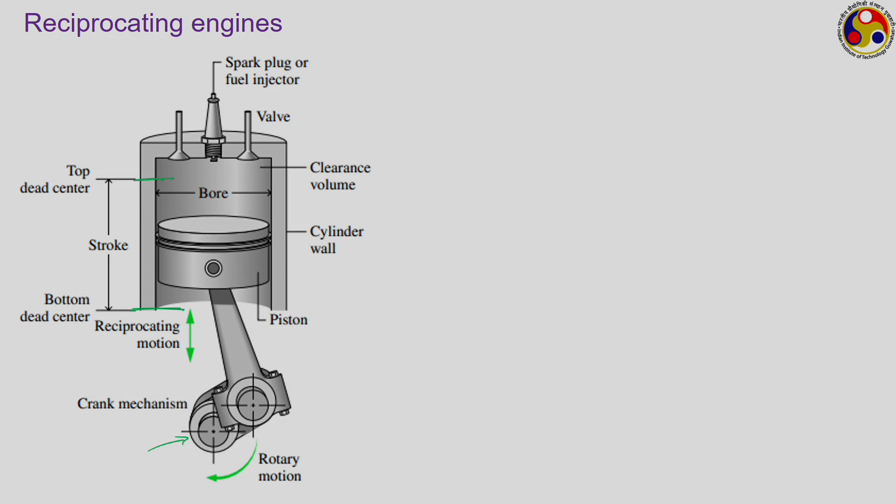We have the crankshaft here and the crank mechanism. The crankshaft rotates, and the corresponding rotary motion is converted to the reciprocating motion of the piston by the crank assembly or crank mechanism. A 180-degree rotation of the crankshaft corresponds to one complete stroke of the piston. And when the piston is operating, this is the situation that we generally get.

This animation I tried to show in the previous week itself, but somehow it malfunctioned. Just look at this point, it starts - this is the suction, now it is compression, this is the power stroke, and now it is the exhaust. During suction, look how the inlet valve is opening. Both valves were closed during compression and expansion, and now it is opening again during the exhaust stroke.

If I run it again - this is compression, this is expansion, and now the exhaust valve is open to have the exhaust stroke. As soon as the exhaust valve closes, the inlet valve opens again to facilitate the inlet or suction process. So this way the cycle keeps on operating.

Generally it operates at a very high speed. It is very common to have cycles operating at something like 3000 rpm. 3000 rpm means we are talking about 3000 full revolutions of the crankshaft in 1 minute.

So, 3000 revolutions per minute is equal to 3000 by 60 revolutions per second, that means we are talking about 50 revolutions per second. That means in 1 second the crankshaft has 50 revolutions, and if we are talking about a 4-stroke engine, we know that 2 revolutions of the crankshaft, or 2 full rotations, correspond to 4 strokes, that is 1 full cycle. So, 50 revolutions per second leads to 50 by 2, that is 25 cycles per second.

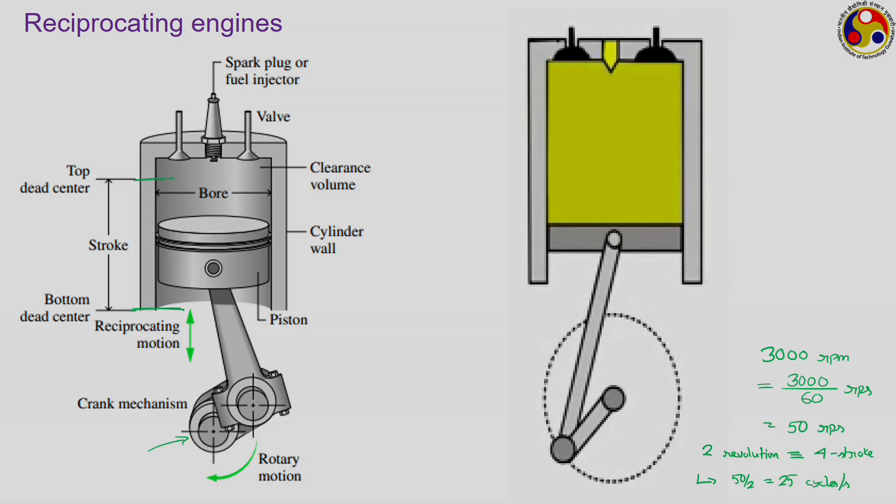So that is a very high speed that we are talking about, and this is generally the way all 4-stroke engines work. This is the ideal cycle, again a slide repeated from the previous week's work.

This is the actual operation where we have the compression stroke to start with, then we have the power stroke during which the piston is moving down from the TDC to BDC following a spark which is produced here. There is a 4-stroke spark ignition engine. Then finally we have the exhaust stroke.

During the exhaust stroke the exhaust valve is open, and at the end of the exhaust stroke, as soon as all the exhaust gases have gone out, we have the suction stroke starting again, during which the piston is moving down, making more space for the new fuel air mixture to come in. And this is the corresponding representation on a PV plane.

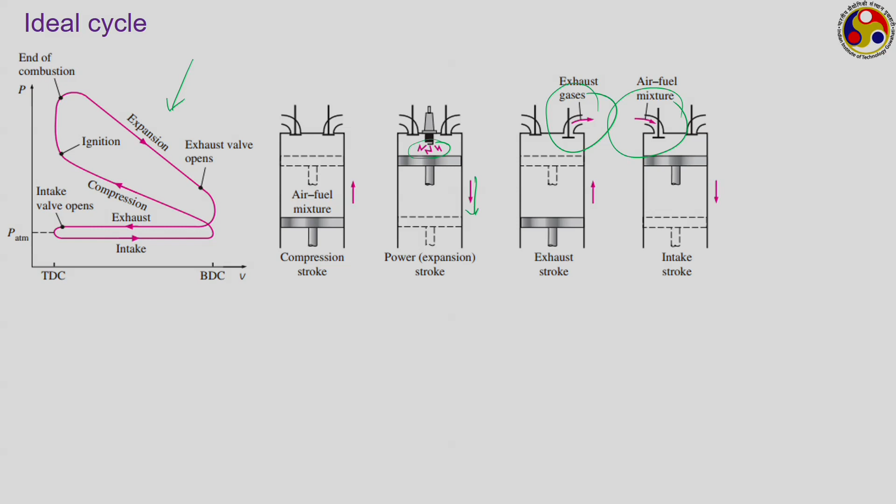However, this is the actual cycle, and this we have conceptualized in the form of an ideal cycle, the Otto cycle, just like this, where we have assumed several air standard assumptions, and following which we get this representation. In the Otto cycle, we have 2 isentropic processes and 2 constant volume processes. The heat addition is at constant volume, and similarly heat rejection is also at constant volume. In between we have an isentropic compression process and an isentropic expansion process.

So this isentropic compression process represents the compression stroke. This isentropic expansion process represents the power or expansion stroke. The spark which is happening here is conceptualized in the form of this constant volume heat addition, and the exhaust and inlet processes together have been coupled into this one constant volume heat rejection process. This is as per the air standard assumption.

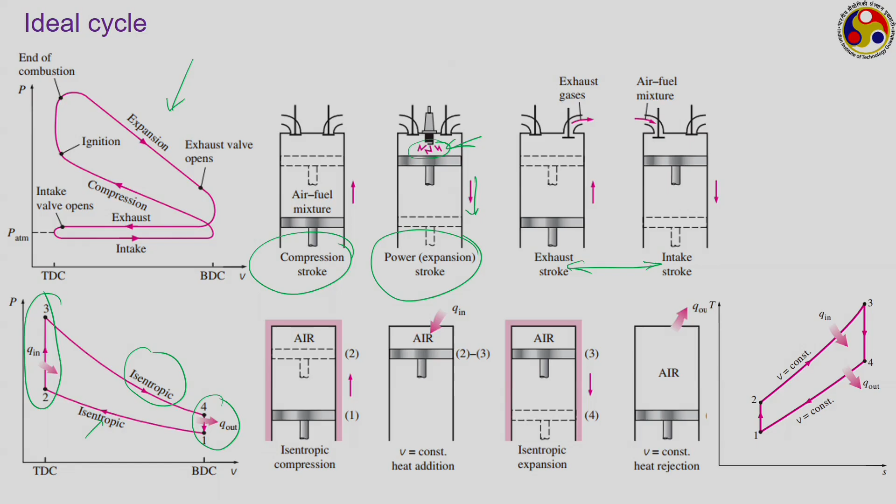This is the corresponding representation on the TS plane. It is generally ideally suited to represent each of such cycles on both PV and TS plane, because the area enclosed by the diagram on the PV plane is a direct representation of the total work done, whereas the area enclosed by the cycle on the TS plane is a direct representation of the total heat interaction or net heat supplied to the system.

As per the first law of thermodynamics, for a closed system undergoing a cycle, we know that the cyclic integral of del Q is equal to the cyclic integral of del W, from where we can easily say that the net heat supplied to the system has to be equal to the net work output that we have obtained from the system.

So, any of the diagrams is theoretically sufficient to provide you the performance parameters in the form of work output or efficiency, but generally it is logical to represent both, so that we also get ideas about the maximum pressure, temperatures, etc., for the cycle. Now, this is an ideal cycle, the Otto cycle. Similarly, we can also draw the diesel cycle, as we have already discussed in the previous week.

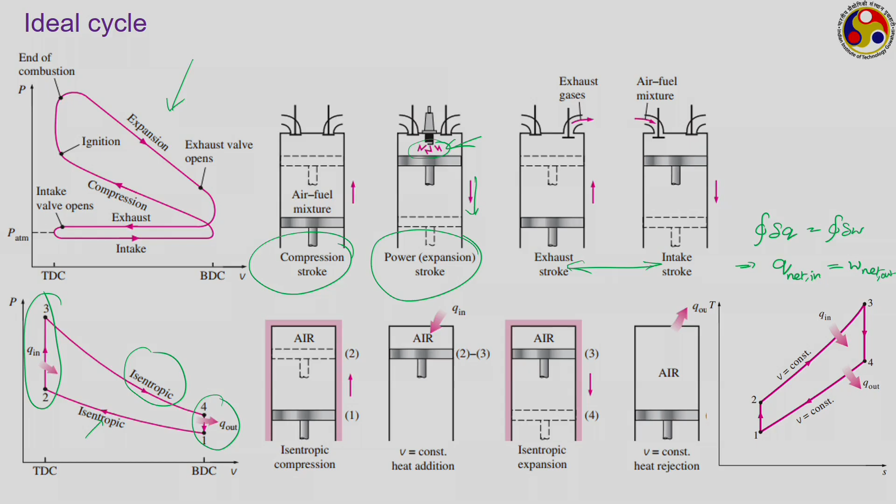Now, let us just quickly take a look at the air standard assumptions using which we have actually plotted this ideal cycle. So, this is the first air standard assumption. If you remember, I am sure that you remember the air standard assumptions. I am writing the same assumptions here, it is a copy of the same slide, but I have reordered those assumptions to suit some requirement.

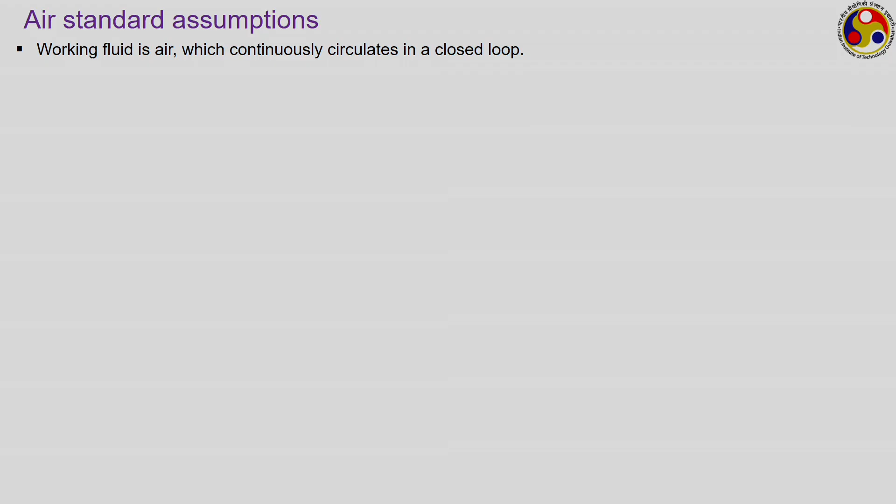So, one assumption was that the working medium is air, and we are assuming it to be a closed system, so that we can assume the same quantity of air is continuously circulating within a closed loop. And we are also assuming that there is no inlet and exhaust process.

These two processes together are replaced by a heat rejection process, generally a constant volume heat rejection in case of both Otto and diesel cycles, or even in case of dual cycles, but that is different in case of the Stirling and Ericsson cycles, because they generally have heat interactions in the form of isothermal processes.

So, in all the cycles that we have studied, starting from Carnot cycle up to Ericsson cycle, in all those cases we are assuming that there is no inlet process and exhaust process, rather those two have been clubbed into a single heat rejection process, which is at constant volume in Otto, diesel and dual combustion cycle, whereas that is isothermal in case of Carnot, Stirling and Ericsson cycles.

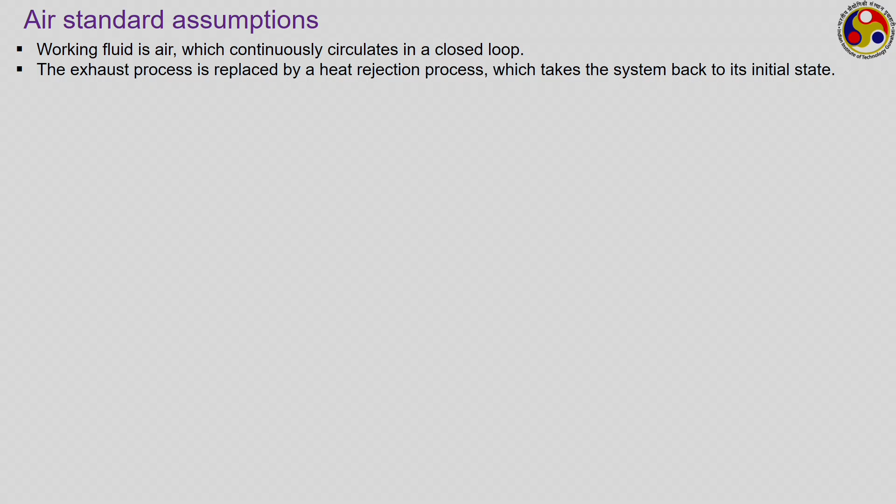So, the objective of this heat rejection process is to take the system back to the initial state, that is, to take the system back to the state at the point of commencement of the compression process. So, these two are the idealizations, but what are the things that we are losing because of this? What are the practical effects or practical factors that actually do not obey this particular thing during real operation?

One thing that we are neglecting is the fluctuations during the inlet and exhaust processes. As the fuel air mixture goes in during the inlet process, the pressure inside the system keeps on fluctuating. In fact, if you just think about the valve, generally outside you have atmospheric pressure or slightly higher, whereas inside the cylinder, as the piston starts to go down during the inlet process, the pressure falls below atmospheric, thereby creating a slight vacuum, so that the fuel air mixture can flow easily into the cylinder.

But as soon as it starts flowing in, the pressure inside the cylinder starts to increase, thereby causing some kind of fluctuations to the valve. The same is applicable during the exhaust process as well. So both pressure and temperature keep on fluctuating, may not be by a very significant margin, but that is very much possible, which can lead to certain issues related to the design of the valves.

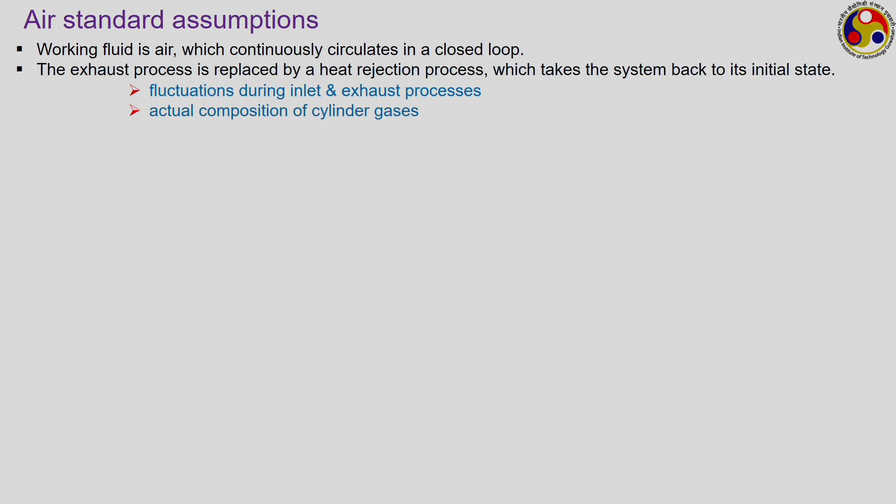A bigger issue that we are completely eliminating is the actual composition of cylinder gases. We are assuming the working medium to be air, and it continues to be air during all the processes, all the 4 processes in the ideal cycle.

But if you think about the practical cycle, for an SI engine operation, it is the fuel air mixture that you supply. So, during the inlet process and also during the compression process, your working medium is actually a mixture of hydrocarbon fuel and air.

So, it is actually a mixture of several gases, like in air we primarily have oxygen and nitrogen, whereas in the fuel we can have several kinds of hydrocarbons, both we can have methanes and similar kind of things, or we can have heavier hydrocarbons as well in the group of ethylene, or even going to even heavier hydrocarbons in the group of benzenes.

We are completely neglecting the actual post-combustion composition. Because of combustion, the hydrocarbon gets converted to a mixture of carbon dioxide and water vapor. In case of incomplete combustion, we can also have carbon monoxide, or sometimes soot, which is dry carbon particles. If the fuel contains sulfur, we may have oxides of sulfur as well.

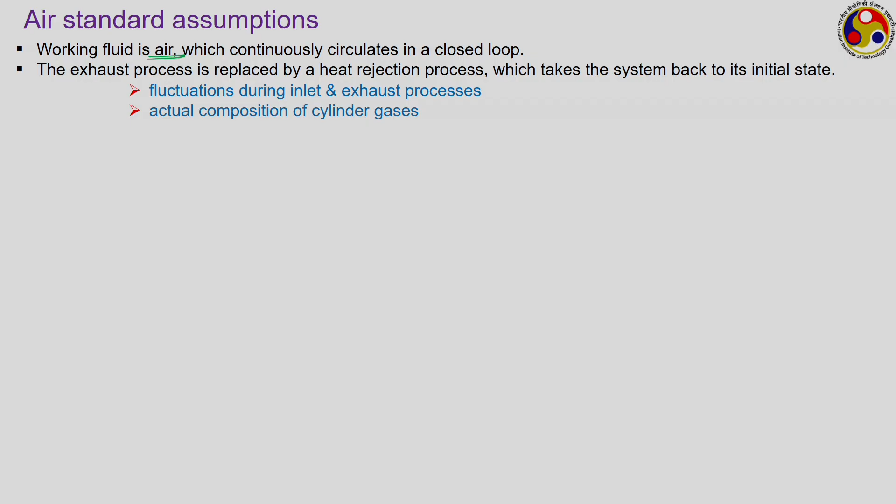So it is again a mixture of gases, different from what we had during the inlet and compression processes. This composition of cylinder gases has been completely eliminated during the ideal cycle. The variation in the number of molecules over a cycle is also neglected. As the number of molecules changes, the pressure inside the cylinder also changes proportionately, and the number of molecules definitely changes because of the chemical reactions. That is also neglected, since we are completely eliminating the chemical reaction and considering it to be a fixed mass of air.

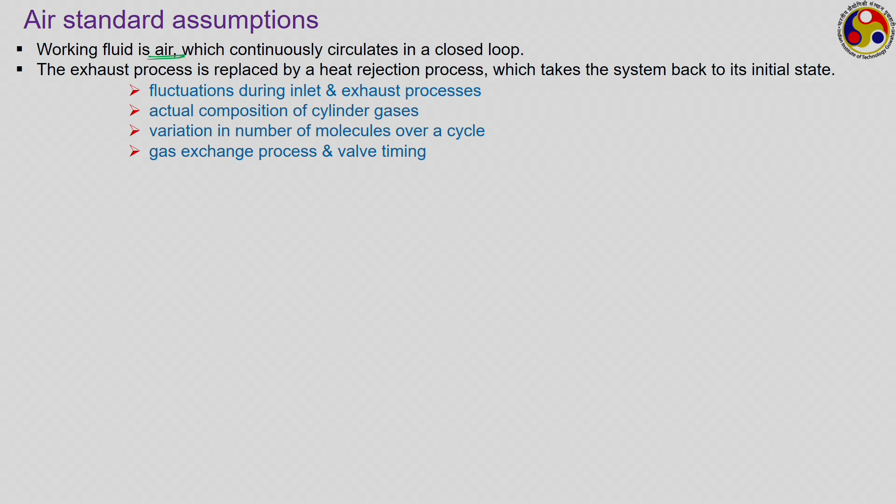We shall discuss the valve timing diagram in detail in the next lecture, but for now, though ideally we should open and close all valves at the dead centers, practically, considering the finite time required for valve opening and a few other factors, we generally open these valves a bit earlier than where they ideally should open, and close them a bit later. Like the exhaust valve should open at a particular location, but it opens earlier than that.

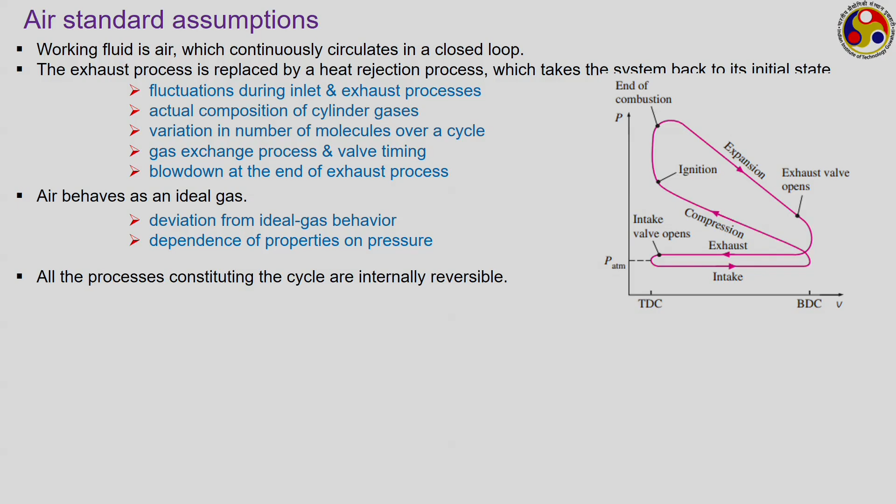We are assuming all the processes constituting the cycle to be internally reversible, so we are neglecting frictional losses. Friction can always be a very significant factor, and this is a loss we can never avoid - it can be a significant portion of the difference between ideal and actual cycle efficiency. In practical engines, to reduce friction we add lubricating oil, which can get mixed up with the fuel, changing the fuel's properties. That contamination effect we are also neglecting.

Then we are neglecting the combustion process altogether. It is replaced by a process allowing heat addition from an external source. In the Otto cycle, combustion is assumed to take place at constant volume heat addition; in the diesel cycle, at constant pressure heat addition; whereas in Stirling and Ericsson cycles, we assume isothermal heat addition. This combustion process is completely eliminated, but that definitely has a significant impact on actual cycle operation.

In an SI engine, we assume combustion to be instantaneous, but practically it requires a finite amount of time, and as combustion progresses there is a gradual change in the composition of the gases. There's also dissociation of combustion products - when temperature goes very high, the products of combustion can dissociate back to the original reactants. This is called dissociation, and it can have a significant impact. We'll talk about this shortly.

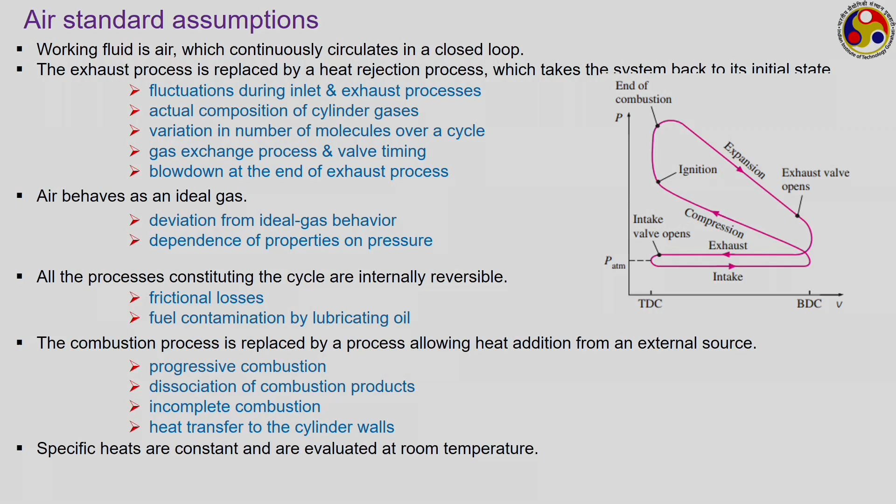Finally, we are assuming specific heat to be constant. That is probably, at least from a theoretical point of view, the biggest source of error we can encounter, because specific heats are strong functions of temperature - they increase rapidly with increase in temperature.

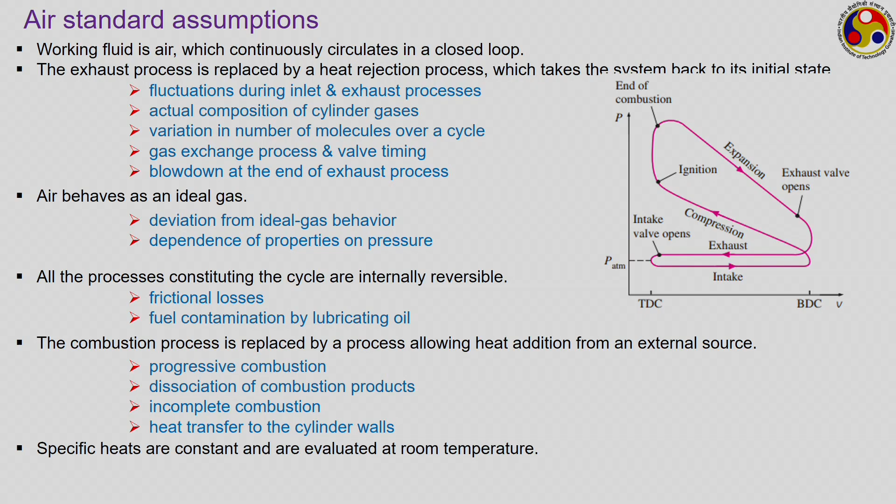So because of each of the air standard assumptions, we are losing something - eliminating external factors which lead to deviation between actual and ideal cycle prediction. Therefore, if not possible for all, at least some of them can still be taken care of theoretically, and for that we consider something known as the fuel air cycle.

The fuel air cycle is a modification of the ideal cycles, where among all the factors just listed, not all but 4 of them we are considering or adding to the ideal cycle. Factor number 1 is the actual composition of cylinder gases. In the fuel air cycle, we are adding these factors to the ideal cycle we already discussed, like the Otto or diesel cycle, from the previous week.

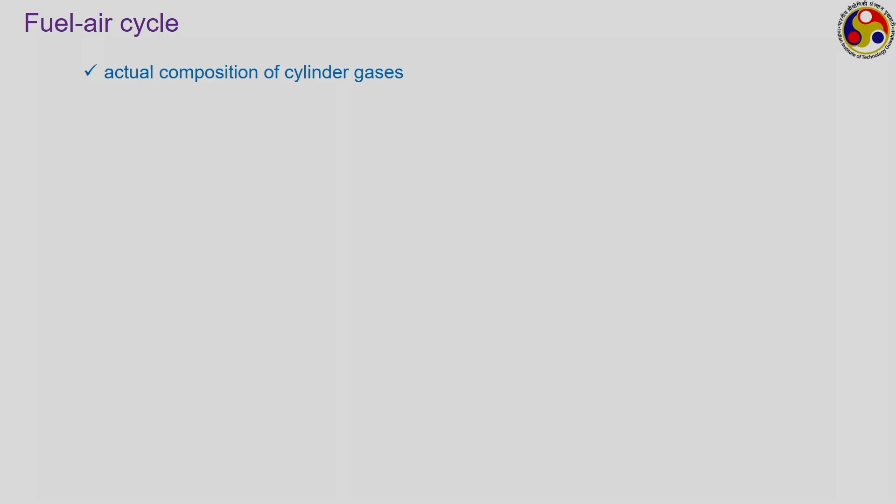On those ideal cycles, we are adding 4 factors to have the fuel air cycle, and the first factor is the actual composition of cylinder gases. So, we are going to consider the true composition of the fuel air mixture during the suction and compression stroke of an SI engine, whereas we shall be talking about the mixture of combustion products during the after combustion process.

In case of CI engine, however, we do not need to consider the mixture, because in CI engine we know that it is only air which is supplied. So during suction and compression process it is only air. There will be no change in case of CI engine or diesel cycle during those two processes. However, during the post combustion processes we need to consider the composition of combustion gases.

Then the second factor that we consider is the variation of specific heat with temperature. It probably has the most significant effect on cycle performance. Then the effect of dissociation, that is the reverse reaction that can take place at very high temperatures, that will be taken care of. And the variation in the number of molecules, that can also have significant effect, that we shall be seeing shortly.

So these are the 4 factors that we are going to consider in case of fuel air cycles. These are the 4 factors we are going to add on the ideal cycles to get the fuel air cycle.

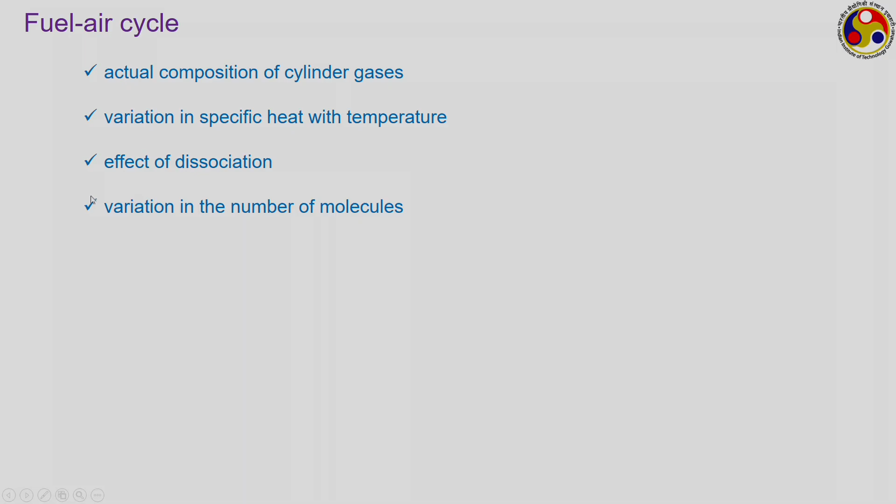Of course, in fuel air cycles we are still assuming several factors, like no chemical change in fuel or air composition prior to combustion. So chemical reaction will start only at the point of combustion, but in true engines we may have some pre-combustion reactions with change in temperatures. Those are neglected. We are talking about any change in chemical composition just from the point where combustion is initiated.

Then mixture is always in chemical equilibrium after combustion. So that is an important assumption.

Then we are assuming no heat exchange between the gases and cylinder walls. We have seen that this can have significant effect. Those kind of heat leakages we are neglecting, assuming adiabatic walls.

Then friction is also neglected. Frictionless compression and expansion processes are assumed. Then negligible fluid motion inside the cylinder. The fluid itself can move inside the cylinder because of such fast motion of the pistons, but that fluid motion and corresponding kinetic energy of the fluid, that we are neglecting.

We are assuming the fuel to be completely vaporized and perfectly mixed with air during the supply process. So as we are supplying fuel, we are assuming that the liquid fuel, that is gasoline, has completely been vaporized, and we have succeeded in preparing a perfect mixture of this fuel and air, and then only it is supplied. Similarly, we are also assuming combustion to be instantaneous, that is at constant volume.

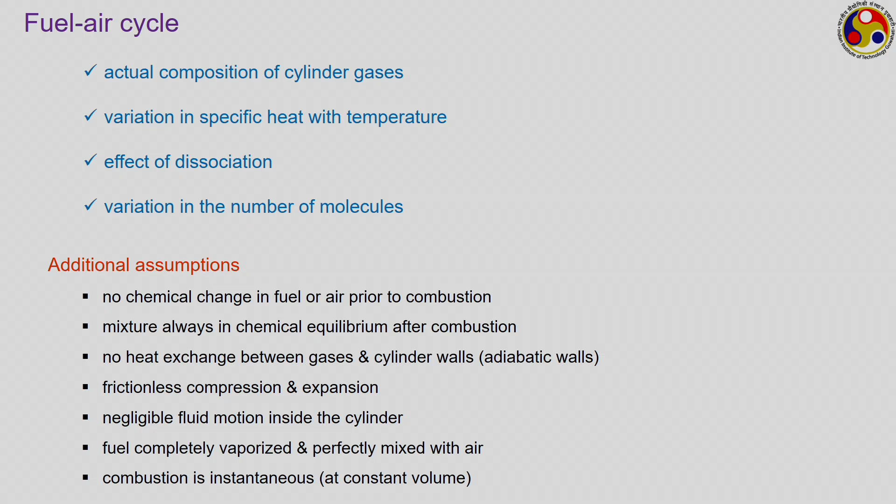Of course, these last 2 points are applicable only for SI engine based cycles, because in CI engine based cycles we have combustion at constant pressure, and also we supply only air. So these last 2 points are not applicable for CI engines, only for SI engines we have them.

So now let us consider all these 4 factors one after the other. But before that, I would just like to mention that in case of air standard cycles or ideal cycles, which we have discussed there, what is the most important parameter that we have identified that can affect the cycle performance? That is the compression ratio, and that is probably the only factor that we can consider.

In case of CI engines, we can add the cutoff ratio to this. The fuel air cycle is the first effort where we are considering the actual composition of gases, that is the nature of the fuel, the nature of fuel air mixture, that comes into play, and therefore, we can analyze the second most important factor in actual engine performance, that is the fuel air ratio.

A fuel air ratio is nothing but the mass of fuel divided by mass of air in a mixture, or you can say the mass flow rate of fuel by mass flow rate of air. This mass of fuel and air present in a mixture is represented by this fuel air ratio. Sometimes we talk about the other thing also, that is air fuel ratio.

Air fuel ratio is nothing but the opposite of this, mass of air by mass of fuel present in a mixture. After compression ratio, this is probably the second most important factor. But as we are assuming air to be the working medium in ideal cycles, the fuel air mixture or fuel air ratio never comes into consideration in ideal cycles, but we can analyze that in fuel air cycles.

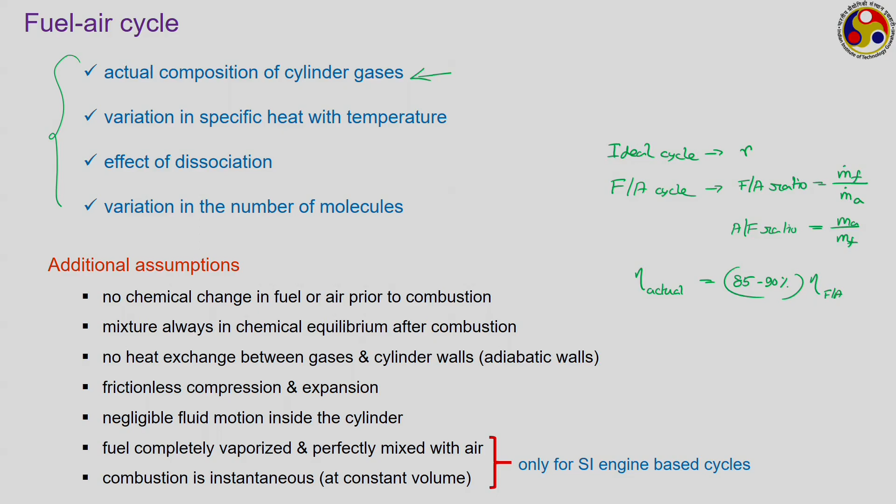Why is there still some difference? That is because of these assumptions, like we are neglecting any kind of frictional losses, we are neglecting any kind of heat leakage, we are neglecting the chemical non-equilibrium that can be present in the system. All this can have some 10-15% influence, which reduces the actual cycle efficiency even further from the fuel air efficiency.

Also, using the fuel air assumption, we can get a correct estimate of the maximum pressure and temperature that can exist in a cycle. The pressure temperature ranges predicted by the ideal cycle again can be far off from real operation, but the fuel air cycle gives a quite reasonable estimate about the maximum pressure and temperature of the cycle, and also a reasonable estimate about the role played by different parameters on the cycle performance.

And therefore, from a design and construction point of view, the fuel air cycle is probably more important. But of course, that can't undermine the ideal cycle, because it is the ideal cycle only which allowed us to conceptualize the diagram. We are creating the fuel air cycle by adding these 4 factors on the ideal cycle. So, the ideal cycle comes first, then we add these factors to get a more realistic estimation in the form of the fuel air cycle, and on that, once we add factors like friction etc., then we get the actual cycle operation.

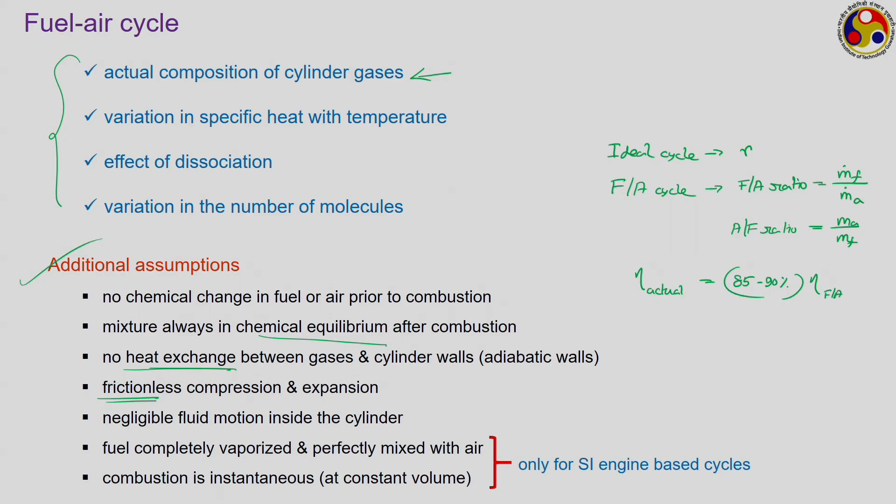So, the first factor is the actual composition of cylinder gases. The actual composition of fuel air mixture, as we have already mentioned, can change significantly, and as that changes, the corresponding property of the mixture can also change.

Whatever may be the property of air, let us say if we talk about just specific heat, whatever may be the specific heat of air, a mixture of carbon dioxide and water vapor may have a very much different value of the specific heat. So, we need to know the proper composition of the cylinder gases.

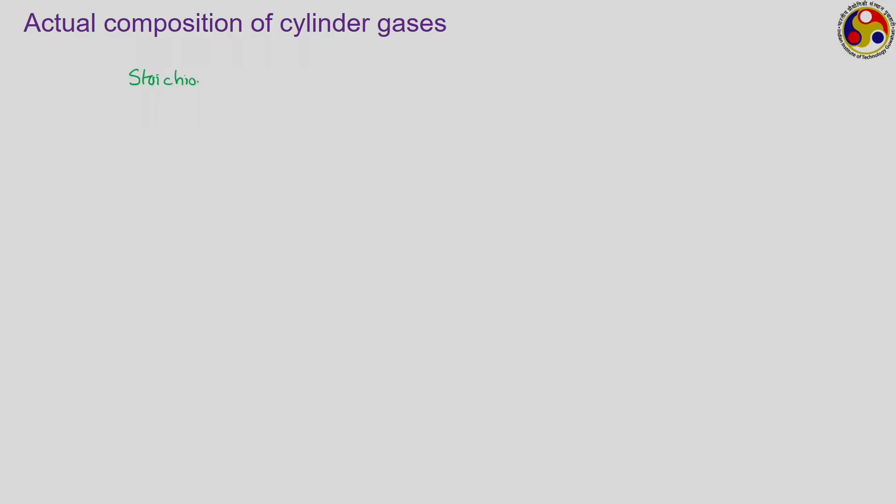In this conjunction, I would like to introduce one term known as the stoichiometric ratio or stoichiometric mixture. A stoichiometric mixture refers to a mixture of fuel and air which contains exactly the same amount of air that is required for its complete combustion. I repeat, a stoichiometric mixture refers to a mixture of fuel and air which contains precisely the same amount of air required to have complete combustion of that quantity of fuel.

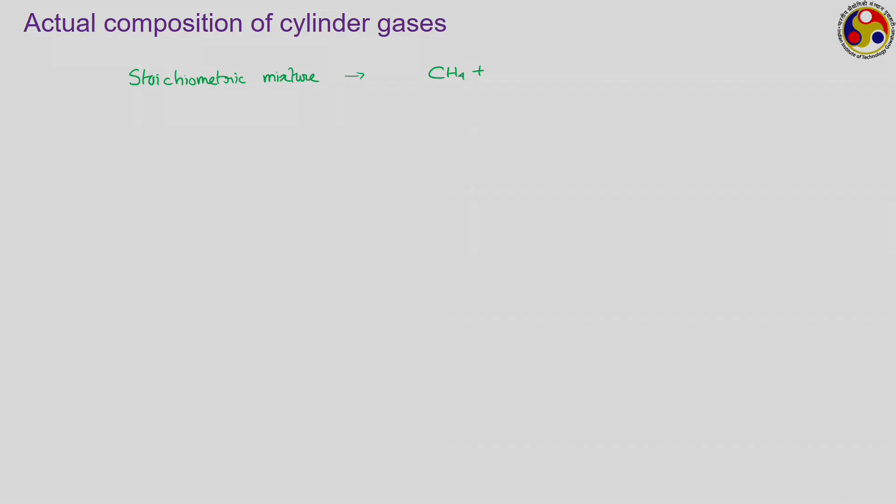Like if we consider a simple chemical reaction using methane as the fuel. So, if we have CH4 plus we want to write the chemical reaction, we know that we can write it to be CH4 plus 2O2 to get CO2 plus twice H2O. It is a complete chemical reaction. It is complete in all sense, or not in all sense, because in a practical engine to have the combustion of methane we can't supply pure oxygen.

Rather we supply air, and air can be visualized to be a combination of oxygen and nitrogen, and generally by volume nitrogen is 3.76 times of oxygen. So, whenever you are supplying any one mole of oxygen, 3.76 moles of nitrogen also comes with that, and therefore, to complete this reaction we also need to have this 3.76 moles of nitrogen on the product side. It is an inert kind of gas, and the way it comes in it just goes out the same way. So now it is a complete chemical reaction.

Then to have complete combustion of 1 mole of methane, how much mole of air do we require? We can have a very simple calculation. So, 1 mole of methane, if we take rough values, then we can calculate the mass of 1 mole of methane to be, or let me say 1 kilomole I should write.

There is a common SI symbol. So carbon is 12 plus hydrogen is, taking approximate values, 1. So it is equal to 16 kgs. So 1 kilomole of methane weighs 16 kgs.

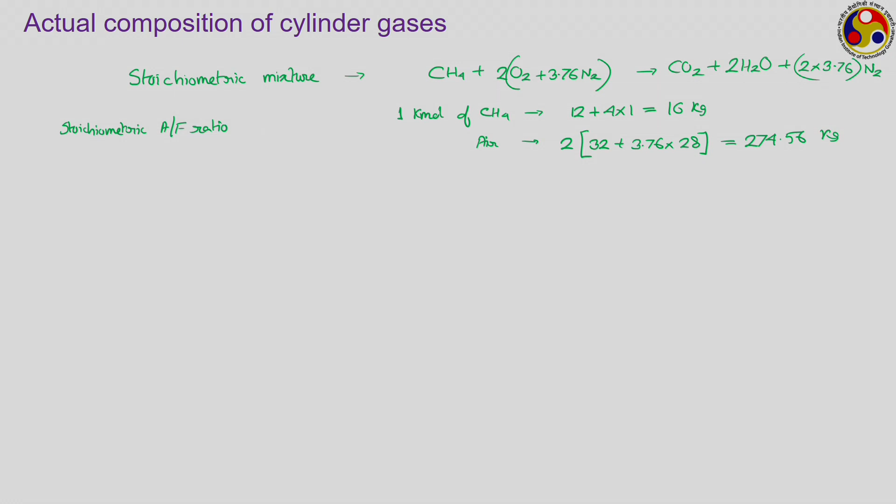So from here we get that to have complete combustion of 1 mole of methane, that is about 16 kg of methane, we have to supply 274.56 kg of air. Therefore, the corresponding stoichiometric air fuel ratio will be mass of air divided by mass of fuel: 274.56 divided by 16 gives a number of approximately 17.16.

So the stoichiometric air fuel ratio of methane is approximately 17.16. For practical hydrocarbon fuels, it generally varies in the range of 14 to 16. For practical gasoline or diesel group of fuels, it is in the range of 14 to 16. So stoichiometric air fuel ratio gives us the minimum quantity of air required to ensure complete combustion. Truly speaking, in practice, if we provide exactly this amount of air, we may not still have complete combustion, because completeness of combustion depends upon whether each molecule of fuel is able to come in contact with oxygen or not.

But theoretically speaking, exactly this amount of air should ensure complete combustion of methane, and on the product side we shall be having only carbon dioxide and water vapor, no methane left out, no carbon monoxide kind of intermediate product. And another parameter I have to define here is called the equivalence ratio.

During practical operation, it is not possible to precisely supply the stoichiometric air fuel ratio. We generally supply additional amount of air or less amount of air, and that factor is measured in terms of this equivalence ratio. Equivalence ratio, commonly denoted by phi, is defined as the stoichiometric air fuel ratio divided by whatever actual ratio you are following during the real operation of the engine. So we are talking about the stoichiometric air fuel ratio to actual air fuel ratio. This ratio we are calling the equivalence ratio.

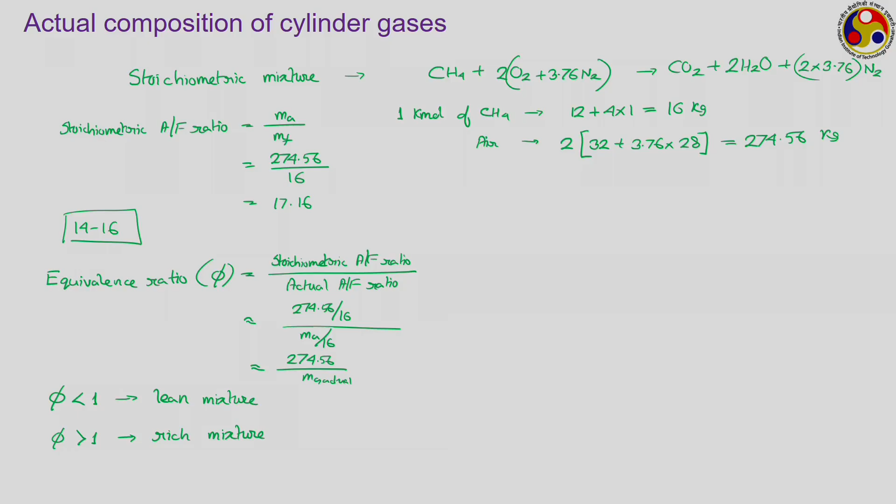So in practical engines, lean mixtures give you better performance. Of course, there is some limit, it does not mean you can keep on adding more and more air, but generally a leaner mixture, particularly in the range of 120 to 130%, or equivalence ratio in the range of 0.8 to 0.9, we get very high values of efficiency. So the composition of cylinder gases definitely can affect the performance.

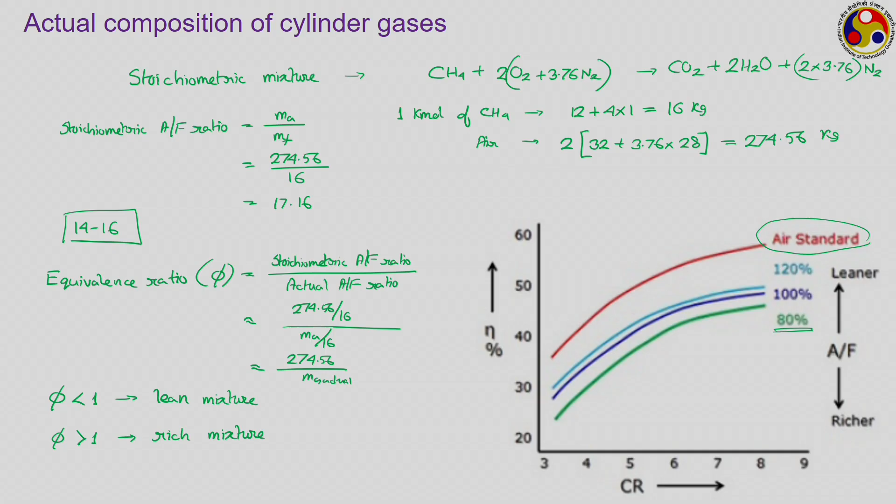To get the theoretical prediction about these values, we can use different combustion charts, or nowadays with digital computers we can easily go for detailed combustion analysis.

The next factor is the variation in specific heat with temperature. This is something we can directly represent on the cycles. Specific heats are strong functions of temperature. At lower temperatures, say in the range of 300 to 1500 Kelvin, Cp generally follows a relation of A plus B1T, and similarly Cv follows A bar plus B1T. This is generally in the range of 300 to 1500 Kelvin.

What is the relation between these two? If we write Cp minus Cv, it will be equal to A minus A bar. And what is the difference between these two? That is R, the gas constant. So the difference between Cp and Cv always remains constant.

As in this case Cp and Cv almost follow a linear relationship over this temperature range, but when you go to higher temperature, Cp becomes a quadratic function, something in the form of A plus B1T plus B2T square, and similarly Cv can be written as A bar plus B1T plus B2T square. This is when the temperature is greater than 1500 Kelvin, which is quite common in case of IC engines. So you can see as the temperature increases, the specific heat keeps on increasing very rapidly.

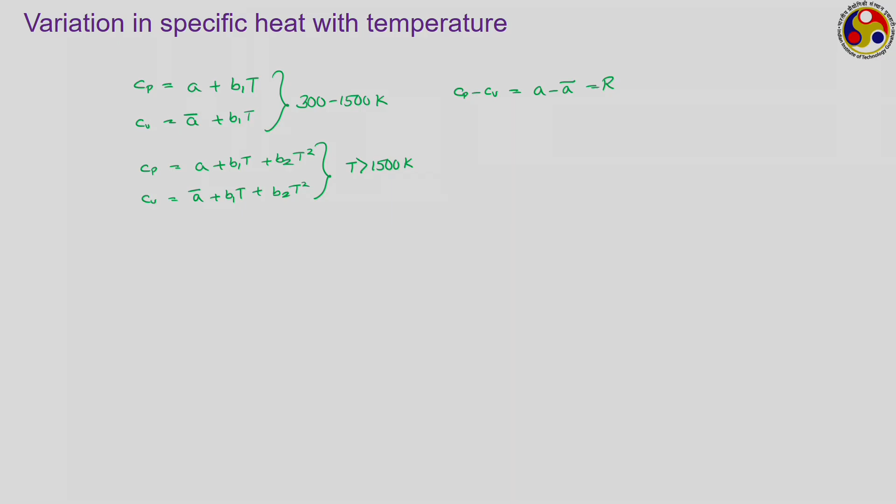If I can give you one simple example, let's talk about air. Cp for air at normal atmospheric temperature like 300 Kelvin is about 1.005 kilojoule per kg Kelvin. This is at T equal to 300 Kelvin. Whereas when we go to T equal to 2000 Kelvin, this becomes 1.345 kilojoule per kg Kelvin. There is a significant change in the value of the specific heat.

A corresponding change in Cv can also happen. The same way, if we subtract R from there, R for air, the value of Cv can also be obtained, and the change in Cp and Cv is directly reflected in terms of K. If you think about the Otto cycle efficiency, we know the ideal thermal efficiency for an Otto cycle is 1 minus 1 by R to the power k minus 1. Now, this R here is a design parameter, because the compression ratio depends on the location of top dead center and bottom dead center. So for a given engine, the compression ratio is fixed, but K is a property of the gas mixture that we are talking about, and K is a ratio of Cp and Cv.

So if we use this particular relation, we can write K as Cv plus R upon Cv, that is 1 plus R upon Cv. Now, as the temperature increases, we can see that Cv increases, so then what will happen to K? As Cv increases, K will decrease, and therefore, it is directly going to affect the thermal efficiency and all other similar calculations.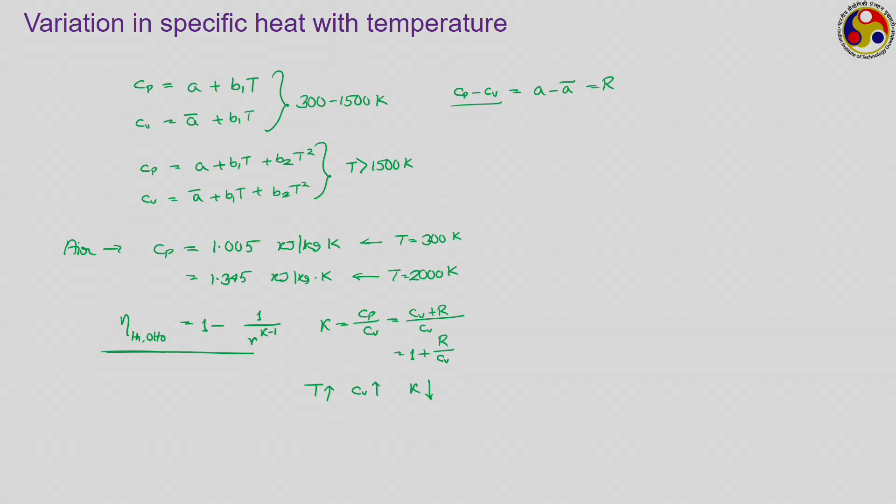Let us check the standard Otto cycle diagram. This is a standard Otto cycle diagram where we are starting the compression process from point number 1, and following the isentropic process we are going to point number 2. Now, we know that T2 is equal to T1 into r to the power k minus 1.

As the compression process goes on, the temperature keeps increasing, and as temperature increases, the specific heats change, causing K to decrease. Then what will be the effect of this?

As the specific heat is changing, if we modify the diagram, the actual compression line will start deviating because of the change in K, since the temperature predicted by that relation at a particular point is no longer valid. As temperature increases, K continuously decreases, and at the end of compression we may reach a point somewhere here, this 2 prime.

This T2 prime can be significantly lesser than T2. Remember, the volume is the same for both 2 and 2 prime, since both are at TDC location, but it is only because of the change in specific heat with temperature, or the corresponding reduction in K with temperature, that point 2 has come down to 2 prime. So we have a reduction in the location of point 2 prime.

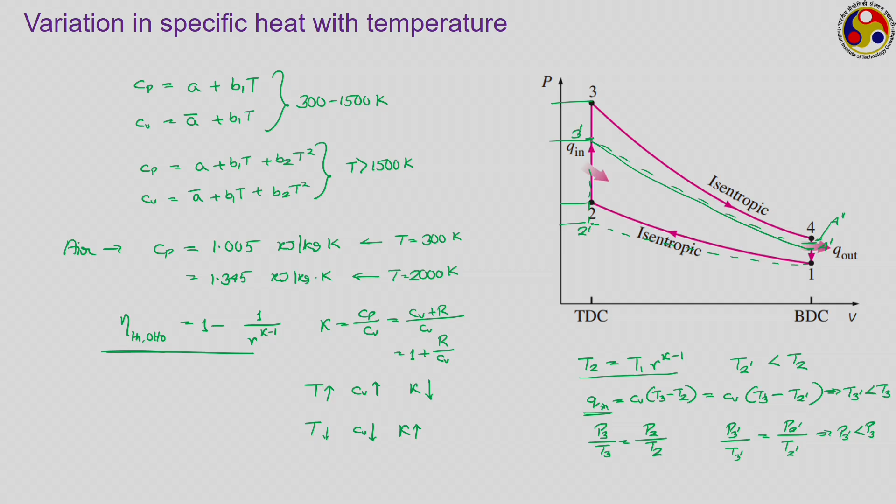So during process 1 to 2, we have a lowering in the temperature level, and so the final temperature at the end of compression — both temperature and pressure — are lower than in the ideal cycle.

During constant volume heat addition, specific heat is changing, and because of that the final temperature and pressure at the end of constant volume heat addition is significantly lower compared to the ideal cycle. Similarly the temperature and pressure at the end of expansion is also lower than the ideal cycle prediction. However, there is some recovery because of the reduction in temperature and corresponding increase in the value of K.

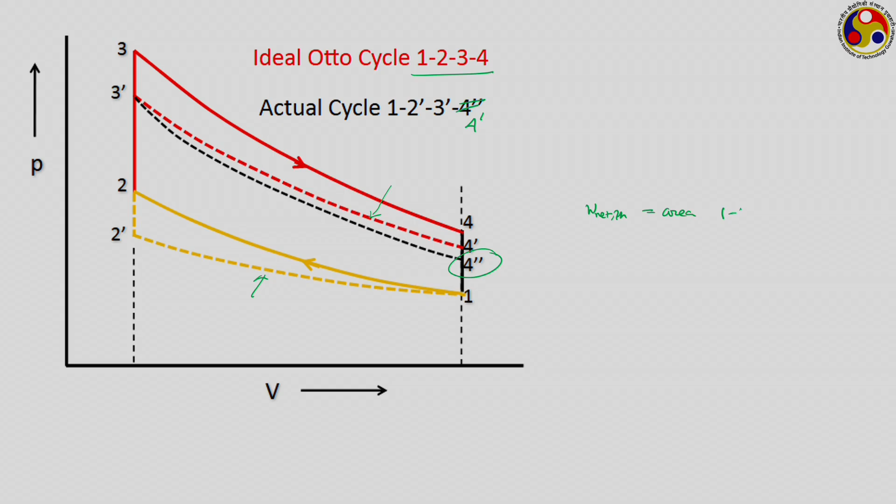So now look at the two diagrams. You have the theoretical work production from this cycle. The net work output theoretical, predicted by the ideal cycle, is the area 1, 2, 3, 4, 1. Whereas the net work output from this fuel air cycle, considering only one effect, everything drawn here considering only the variation in specific heat with temperature, the corresponding area starts from 1, then goes to 2 prime, then we have 3 prime, then we come down to 4 double prime and then back to 1.

And which area is smaller? Definitely the second area is a bit smaller, particularly because the expansion process is starting from a much lower pressure level, which always signifies a lower work output. Similarly, the final temperature level is also lower. This 3 prime corresponds to peak pressure and temperature, and as I have mentioned earlier, the peak pressure and temperature predicted by the ideal cycle, corresponding to point 3, is quite far off from what is being predicted by this fuel air cycle considering the effect of specific heat, given by point 3 prime. So this is the effect of the variation in specific heat with temperature.

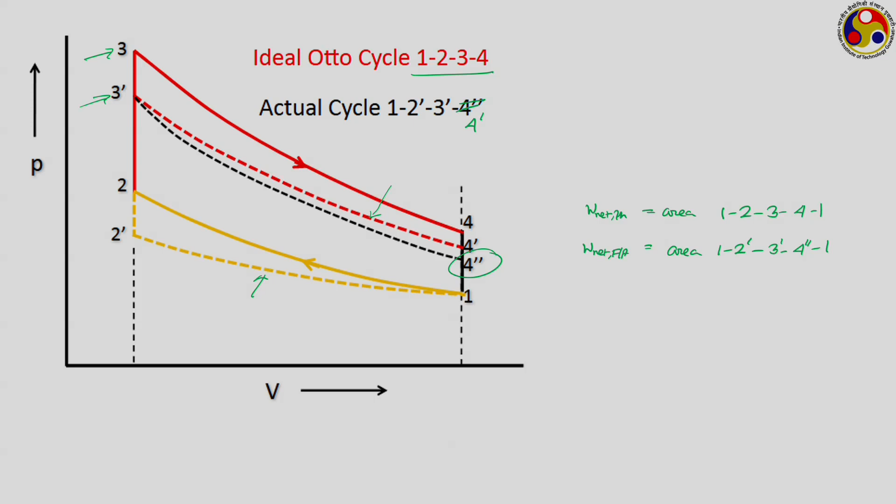But the question is, why should specific heat vary with temperature? A rough answer can be given by considering the amount of energy absorbed by the atoms. Specific heat corresponds to the energy absorbed by the molecules, but inside molecules, in case of multi-atomic molecules, a portion of that energy also goes to the atoms. As the energy level and temperature level increases, molecules keep on vibrating and the atoms inside them also keep vibrating, and their vibration level keeps increasing. Therefore, as we move to higher temperature, more and more energy will be required towards this enhanced vibration of the atoms. So more energy will be absorbed by the molecule itself for a given temperature rise. That is a rough explanation for this increase in specific heat, and you can clearly see the effect from here.

Next is the effect of dissociation. Effect of dissociation talks about the reverse chemical reaction that can happen only at very high temperatures. We know that C plus O2 leads to CO2, but that is at normal conditions. When you go to very high temperature, CO2 dissociates to form CO plus O2. This happens when the temperature generally exceeds 1000 degree Celsius. Similarly, water vapor can also break into hydrogen and oxygen when the temperature crosses something like 1300 degree Celsius, and both these reactions are endothermic in nature.

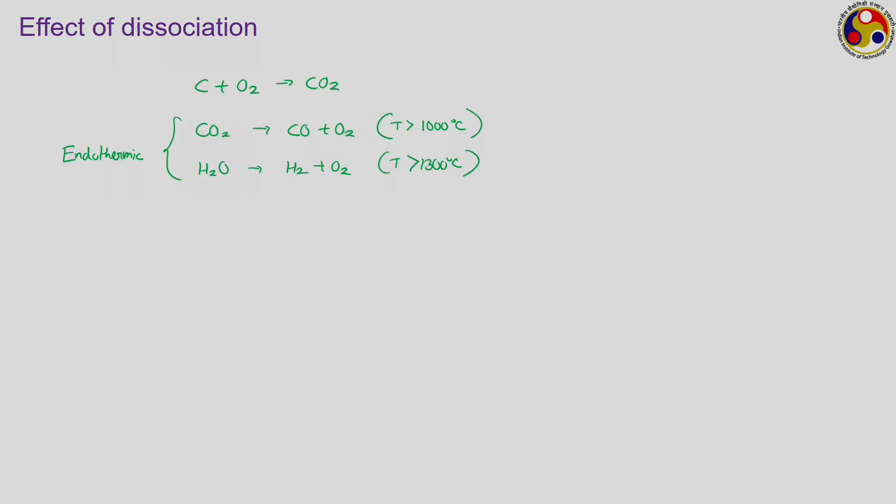When these reactions happen, they absorb energy from the surroundings for these reactions to occur. As temperature increases, the rate of dissociation keeps increasing, and the corresponding amount of energy absorbed from the surrounding material also keeps increasing, thereby lowering the temperature of the total system. Accordingly, it can have significant effect on system performance.

During the compression process, generally the temperature level is quite low. At the end of compression, this temperature is significantly too low to cause any kind of dissociation.

Dissociation comes into picture during the combustion or heat addition process, and as we move higher from point 2 to 3, maybe at some point here, if dissociation starts to get initiated, that will restrict the temperature rise, because whatever heat is being added from the combustion source, that will get absorbed because of this endothermic dissociation reaction, and so the final temperature will get restricted to some point 3 prime. So the effect of dissociation is to reduce the peak temperature.

Remember, there is no change in the position of point 2, because dissociation is not associated with the compression process, but primarily with the combustion process. Because of this, the expansion will now follow a line to move to point 4 prime.

But the opposite effect can also occur, similar to the previous case. As the temperature starts to come down during the expansion process, the products of dissociation, that is CO and O2, recombine back to form CO2, and that reaction is exothermic. So some additional energy is produced, and this line may deviate a bit, ending up at some point 4 double prime.

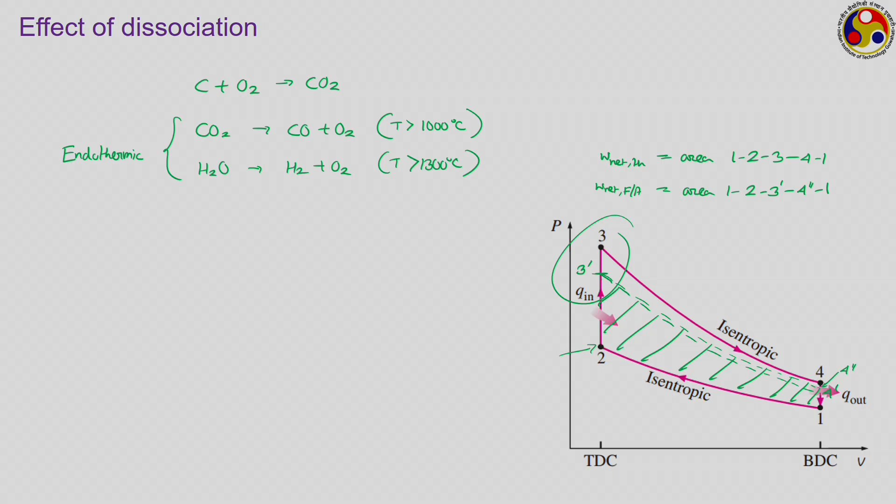Similarly, when air fuel ratio reduces, we are moving to rich mixtures, where fuel is more but air is less. So there is more probability of having incomplete combustion. Incomplete combustion means the combustion products already contain terms like CO and O2, and the presence of these products reduces the rate of dissociation or probability of dissociation. So again the effect of dissociation is lesser for rich mixtures. Dissociation is strongest corresponding to the stoichiometric mixture.

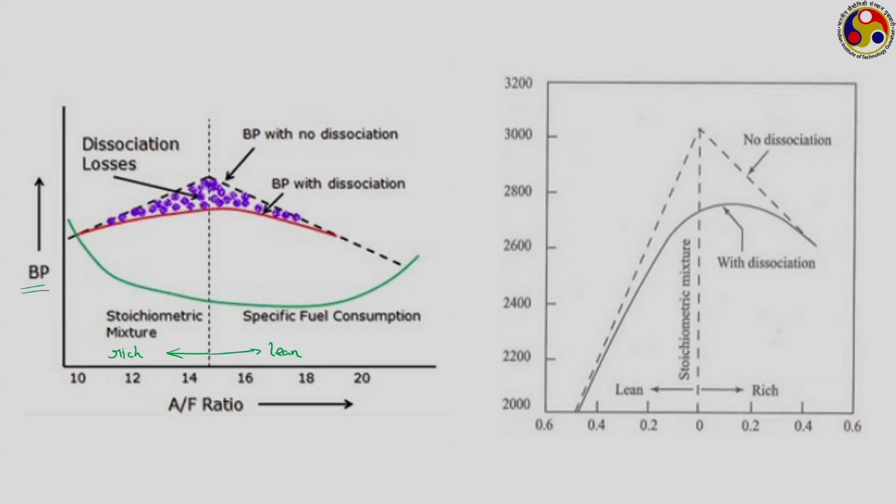Similarly, we can also see the maximum temperature. This thing can be called the degree of richness. Here 0 corresponds to the stoichiometric mixture, and anything greater than this is rich mixture, less than this is the lean mixture. So you can also say this is somewhat similar to the equivalence ratio, because phi equal to 1 corresponds to the stoichiometric mixture. When phi is greater than 1, we talk about rich mixture. So it is something like phi minus 1 approximately.

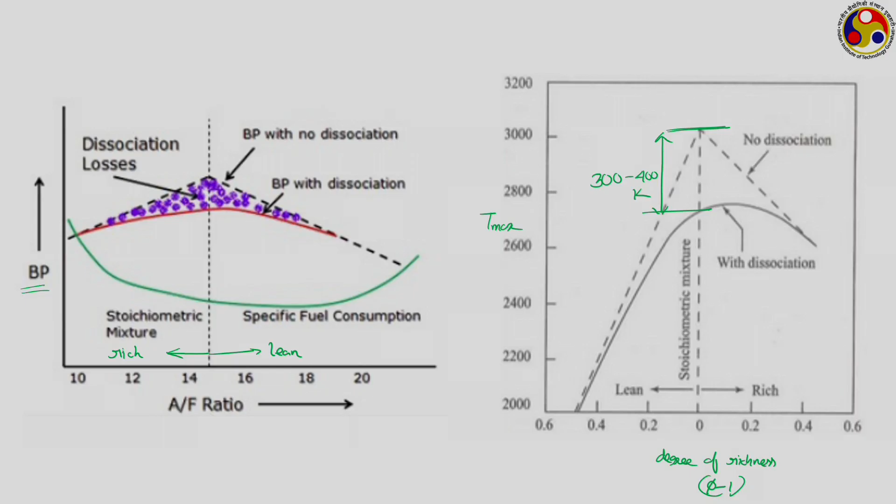So you can again see when there is no dissociation, this is the highest temperature. However, with the presence of dissociation, there is a change of about 300 to 400 Kelvin reduction in the final cycle temperature. Corresponding reduction will be in the cycle pressure as well, and therefore we lose in the cycle efficiency and output. Final effect is the variation in the number of molecules.

Now you may be wondering what can be the effect of the number of molecules. The effect comes from the ideal gas equation of state. The ideal gas equation says PV equal to mRT, or you can also write N R-bar T, where N is the number of molecules and R-bar is the universal gas constant. Therefore, P is equal to N into R-bar upon V into T. Now, for a given volume and temperature, with R-bar being a universal constant, P is directly proportional to the number of molecules or moles present. Therefore, if the number of moles increases, the pressure will increase; if the number of moles decreases, the pressure will decrease, thereby affecting the work output.

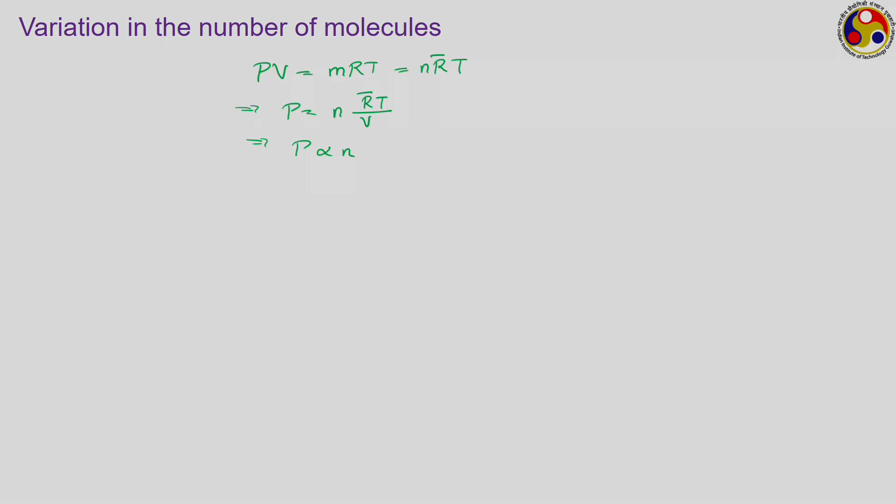Think about some standard chemical reaction, like CH4 plus 2O2 giving CO2 plus 2H2O, the one we considered earlier. On the reactant side, how many moles do we have? 1 plus 2 equal to 3 moles. On the product side, 1 plus 2 equal to 3 moles. So because of this reaction, there is no change in the number of molecules; they are in balance.

Now take another, even simpler reaction: C plus O2 giving CO2. How many moles on the reactant side? 1 plus 1 equal to 2, whereas we have only 1 on the product side. Another common example, 2H2 plus O2 giving 2H2O. On the reactant side we have 2 plus 1, that is 3; on the product side we have 2.

So because of this chemical reaction, what is happening? The number of moles on the product side is actually reducing, and this is called molecular contraction. That is because, due to the chemical reaction, the number of moles is reducing, or the total volume, in mole sense, is getting contracted a bit. And as the number of moles is reducing, the corresponding pressure will also reduce.

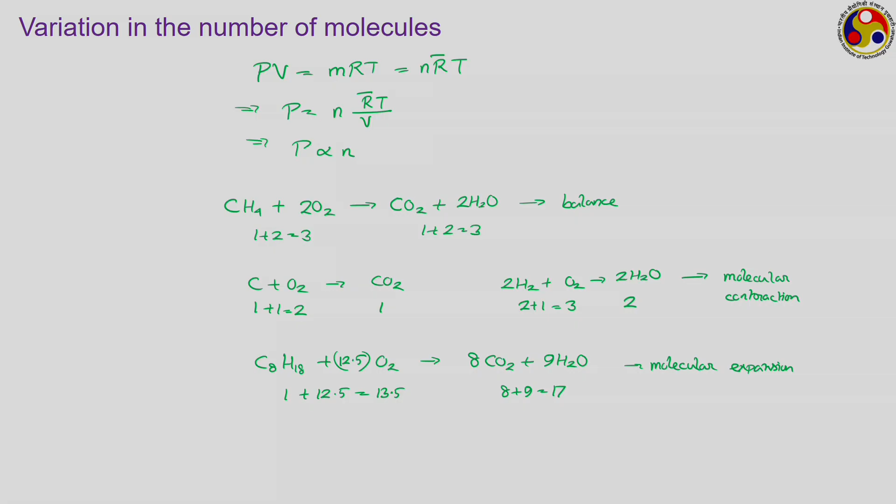So because of this variation in the number of molecules, the system pressure can directly change, thereby affecting the total output. These are the 4 factors that can primarily affect the performance of engines and ideal cycles, and these are the 4 factors we take into account for fuel-air cycles. If we combine their effects - we've discussed each separately, but the effect of dissociation and the effect of variation of specific heat with temperature are more or less the same: to reduce the peak pressure and temperature of the cycle, and thereby reduce the net work output of the cycle.

The effect of variation in the number of molecules is to affect the system pressure, whereas the change in gas composition can affect the chemical properties of this.

I would like to end today with a small numerical exercise. The question: what will be the effect on the efficiency of an Otto cycle having a compression ratio of 8 if Cv increases by 1.6% during operation, with k equal to 1.4 given. Do we only consider the variation of specific heat, or variation of k with Cv, to get the cycle efficiency?

For the Otto cycle we know that eta equals 1 minus 1 by r to the power k minus 1. Here r equals 8, k equals 1.4. Putting these in, the efficiency under ideal conditions, with no variation in specific heat, comes out to be 0.565 or 56.5%.

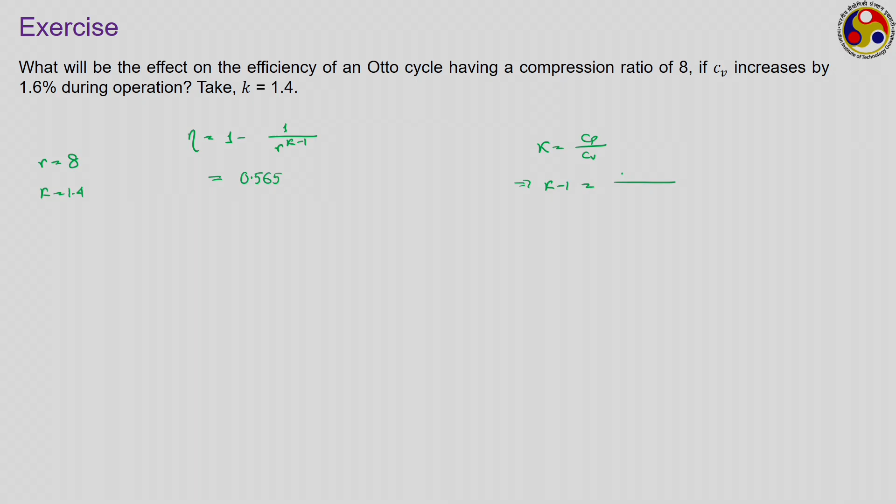But there is a variation in Cv. So how do we take care of that? We know that k is equal to Cp upon Cv, that is, k minus 1 is equal to Cp minus Cv upon Cv, and Cp minus Cv is equal to R upon Cv.

So eta can be written as 1 minus 1 by r to the power R upon Cv, or 1 minus r to the power minus R upon Cv, or 1 minus eta. We are just trying to relate this eta with Cv, because these are the informations given to us. That is why we have modified k in terms of Cv, and we know capital R is a constant, small r is also a constant.

So 1 minus eta becomes r to the power minus capital R upon Cv. We take a log on both sides to simplify this, giving minus R upon Cv into log of r. Now we differentiate both sides.

If we differentiate both sides, what do we get? We get minus of d-eta upon 1 minus eta, because differentiating log of 1 minus eta gives that, with a minus sign on d-eta. On this side, which term is variable? Cv is the only variable, because both capital R and small r are constants. So from there we have Cv to the power minus 1.

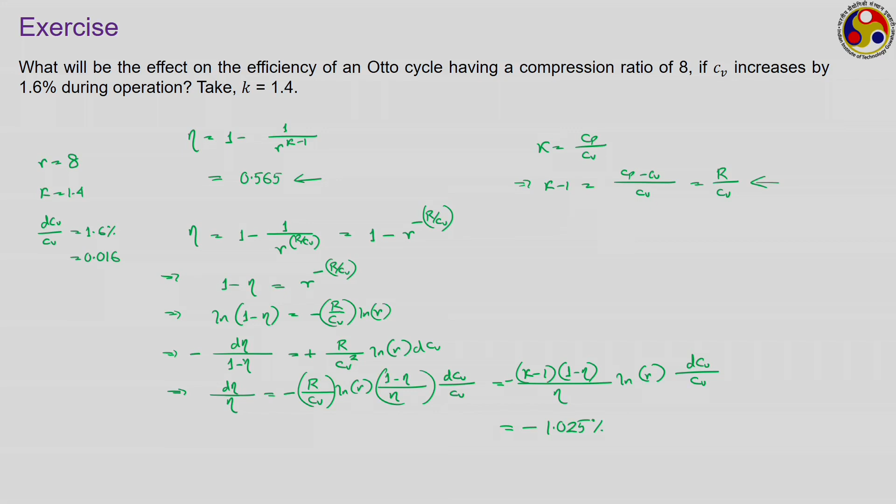Putting everything together, we get this to be minus 1.025%. That is, only a 1.6% variation in specific heat during operation causes more than a 1% reduction in final thermal efficiency. This is considering only the effect of specific heat, a very simple analysis just to show how variation in specific heat can affect cycle performance.

We shall be solving a couple more similar problems in the next lecture, and then we shall be talking about those losses which we have not considered in the fuel air cycle, and also the valve timing diagram.

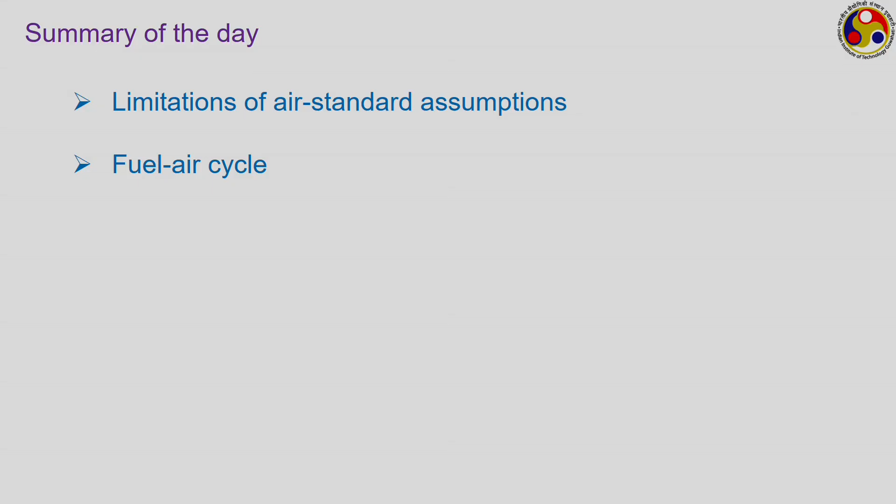So, to summarize today's observation: we discussed the limitations of air standard assumptions, the practical factors which we are excluding. Then the fuel air cycle was introduced, with four factors comprising it: the effect of composition of cylinder gases, effect of temperature dependence of specific heat, effect of dissociation, and the effect of variation in number of molecules.